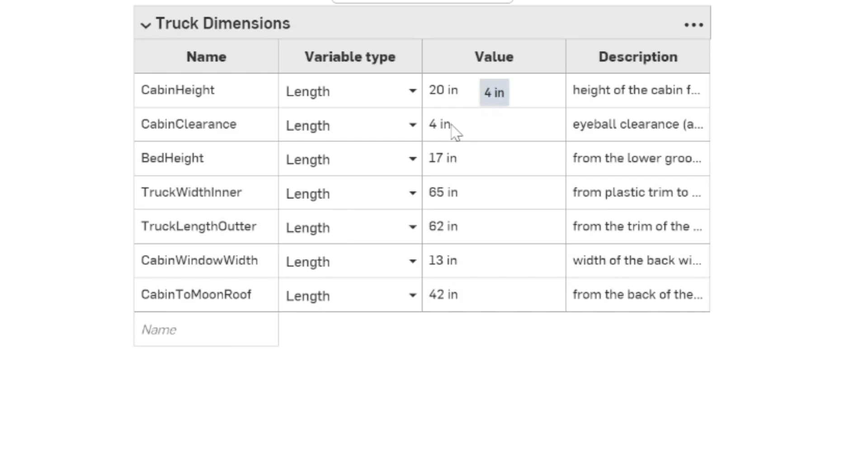So these are the measurements I got for the truck. I have a 20-inch cabin height, a 4-inch cabin clearance, a 17-inch bed height, and a 60-inch inner width, so this is going to be from trim to trim. Essentially, this is where I want my extrusion to fall just outside of, if that makes sense. So my trim is not in the 60 inches, it's right outside of the 60 inches. This is going to be the inside walls of the camper as well, or my inside space, how wide it feels like to me when I'm inside the camper.

The truck length outer is 62 inches, so this was from the cabin trim to essentially the tailgate, and like 1 or 2 inches into the tailgate. But the 62 inches is actually the measurement from the trim to the trim of that railing, the trim rail of the sides, and where that ends. So I'm using that as my truck length outer.

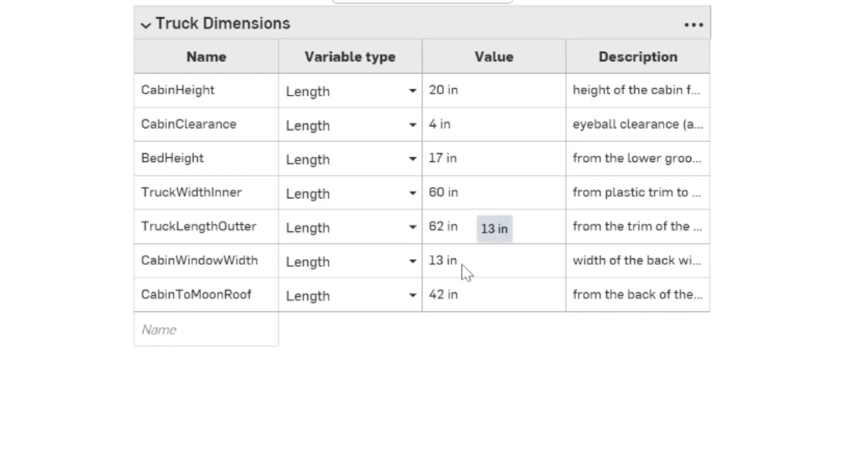My cabin window width is 13 inches. I don't actually end up using this. And then my cabin to moonroof is 42 inches.

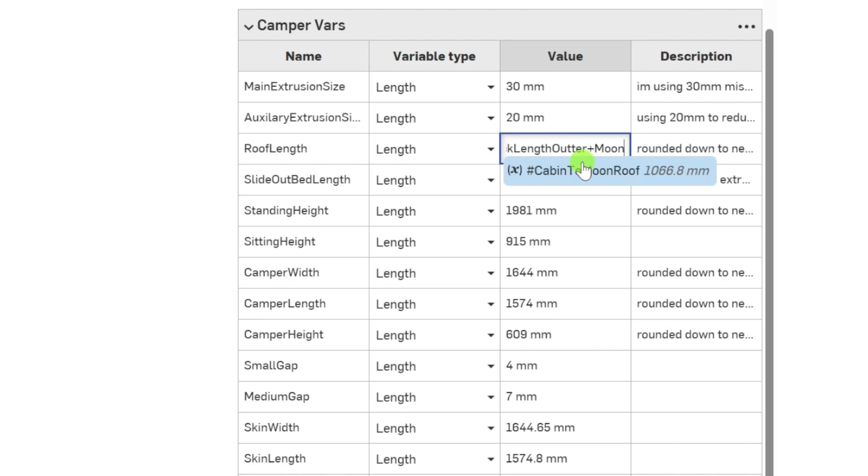So slide out bed, 75 inches. That's a full length bed size. Standing height is 78 inches. I once again kind of chose this number. Neither the standing height or the sitting height is important quite yet, just because I haven't finalized how I'm going to build the pop top.

Eventually, one of these two dimensions will drive my pop top height. I think it will probably be the sitting height, but I don't think I'm actually 36 inches tall when I'm sitting. I'll need to get help measuring my sitting height. But I do also want a little bit of clearance, so that I can stretch in bed when I'm waking up and not bump my head, for instance.

Camper width, so this is going to be the truck width inner plus the main extrusion size times 2, and then times 2. So I want the extrusion that's on the truck bed trim itself to be 2 extrusions wide, and then there's 2 of them on each side. So the overall camper width, that if you were to measure from outside of the camper, is going to be this dimension, which ends up being

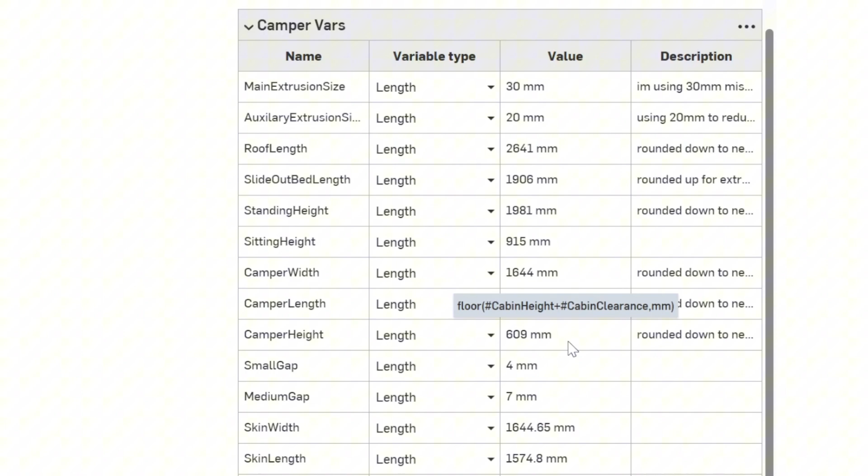1,644. Camper length, that's just our truck length in this case. Our camper height is the cabin height plus the cabin clearance, pretty straightforward. And then I have a small gap, which is 0.125 inches, and a medium gap, which is 0.25 inches.

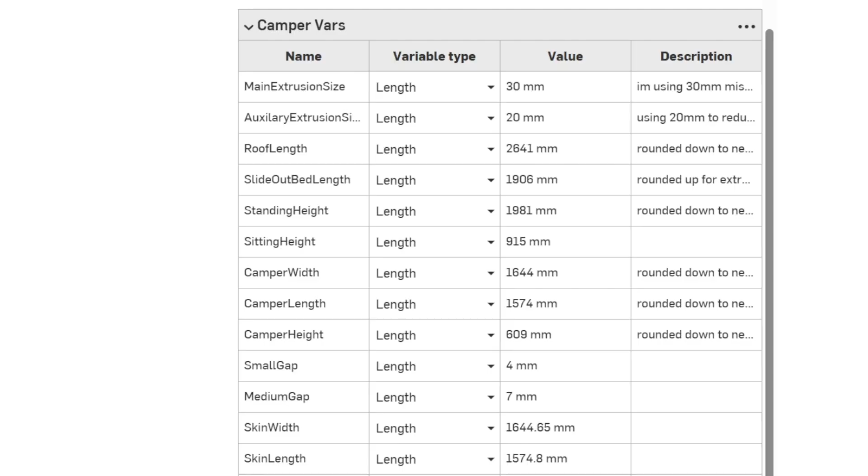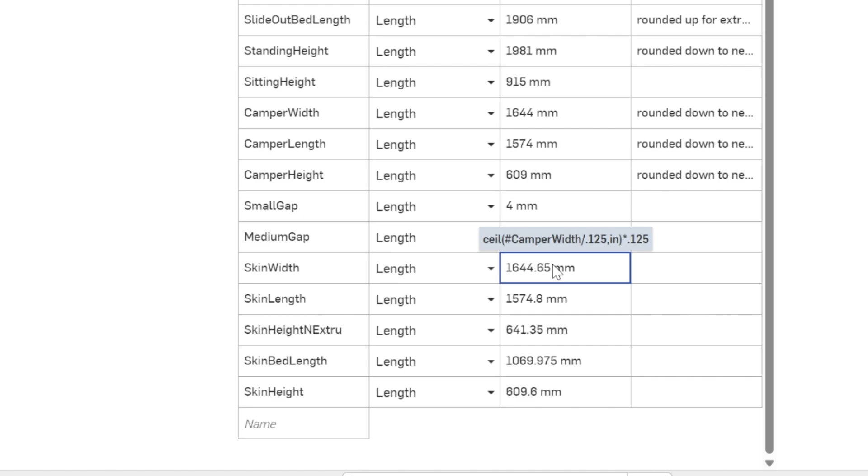I'm going to skip the skin right now, mainly because I don't think it's that important, but it's just calculated off the camper width and then rounding back to inches, and that's because, once again, if I'm supplying ACM skin and asking for it to be pre-cut by manufacturers here in the Bay, most of them are working in the imperial system, which means back to inches. So I'm taking my widths here and ceiling them and then rounding them to the nearest 1/8 inch, because that's usually the accuracy of the cut that they can provide.

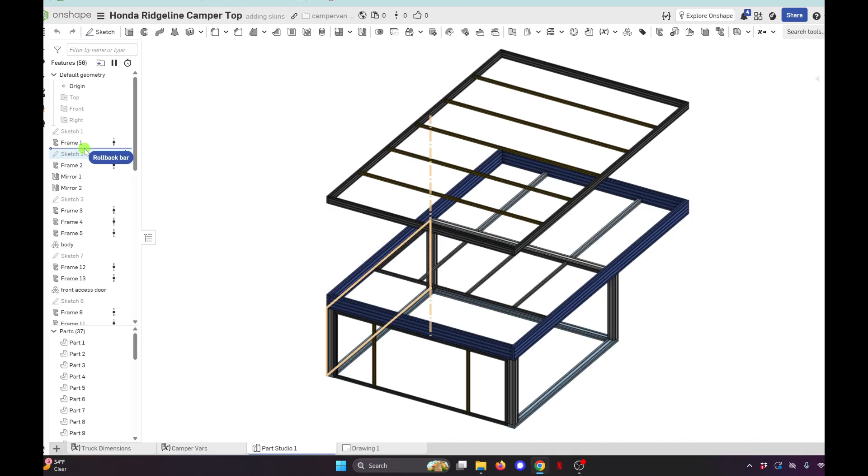Okay, so I'm going to go over how I designed the frame in OnShape as quickly as reasonable. The frame here, very straightforward. Building frames in OnShape is quite simple. You essentially make sketches and then the frames build around your sketch lines, or they can build around faces.

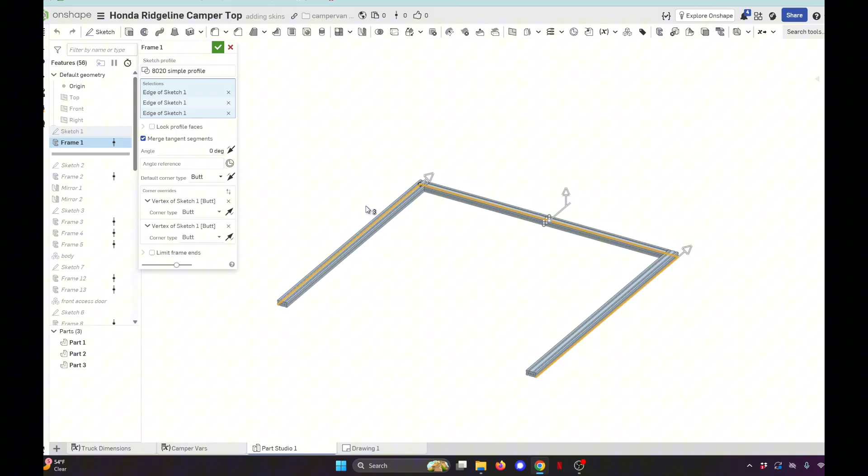So here, for example, I'm saying that, hey, I have this sketch. I want it to be - this is for the bottom part of the main body that is attaching to the truck. I want each of these pieces to be two wide. So I made my own 80/20 simple profile.

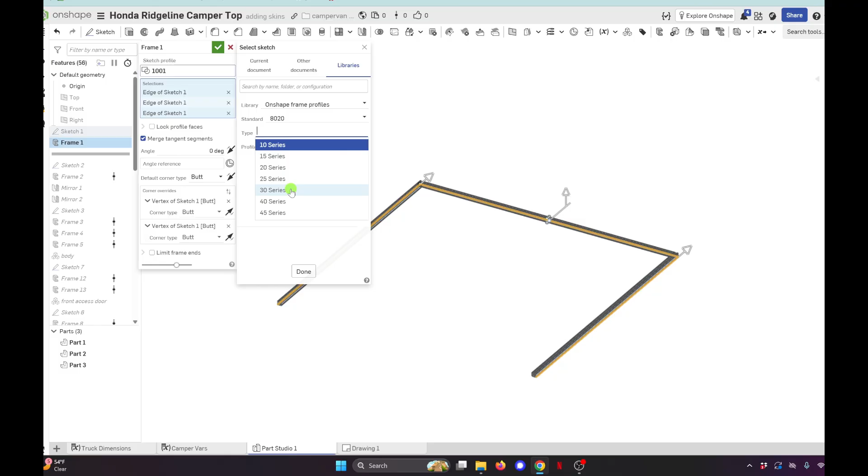And why I did this was because OnShape actually didn't have an extensive enough library for me to use. So they have an 80/20 library, and if, for instance, you were to use the main ones that other people use, you would have no problem using this. However, they didn't have things like - with the 80/20 series, they have the 30 series, but they didn't have a 30x120, which is like a 1x4 extrusion base. So I ended up just making my own, and I did that in another file.

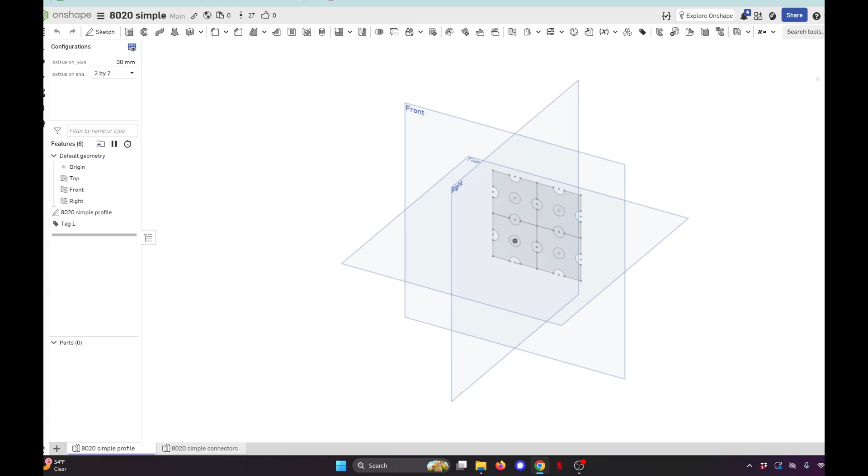Alright, so this is my simple profile. I've made a configuration panel, and we'll look at the 1x1 here. So the sketch for the 1x1 is quite simple.

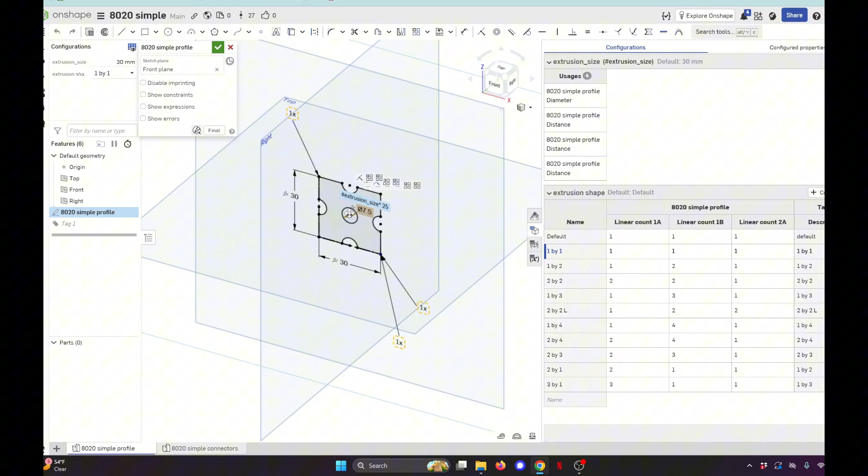It's a square. This is the extrusion size, and then for the 1x1 you just have an array of 1x1. I put 5 circles, so that I have the center, the sides like kind of like slots, and then there's a mate on the center of these sides, as well as a mate in the center of the square. So this allows me to create easy mates in the future.

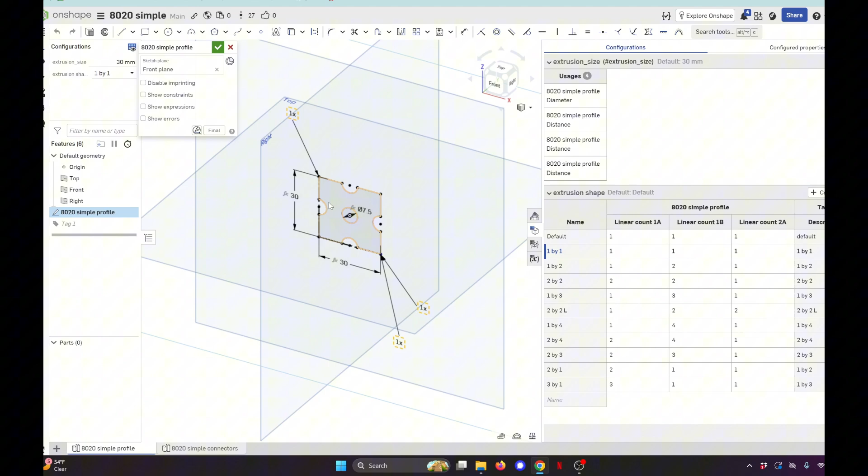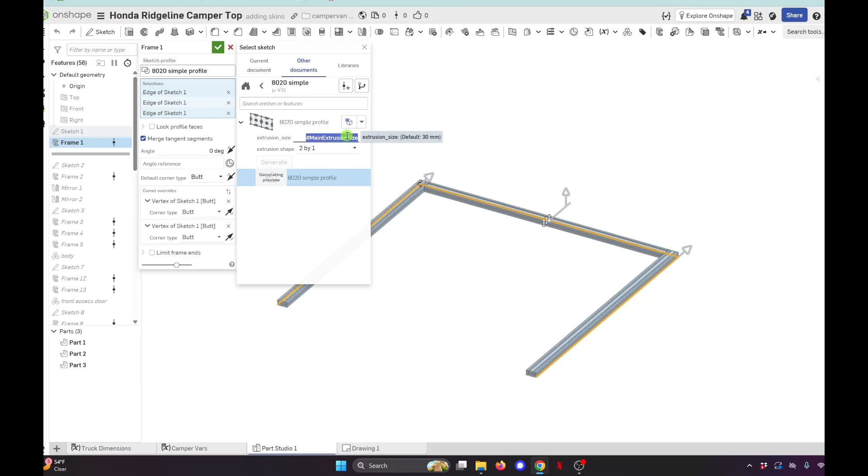So as you can see, I created this table to do configurations. You can have like a 1x2 or a 1x3. You'll see that there is an extrusion size here, but this is not a configured list. This is a configured variable, which means that when you ask OnShape to create the frame itself, you can tell it the variable numbers. So if I were to go and say, hey, I want this to be, I don't know, 60 millimeters, for instance, I can generate, and you can see now it widened, right?

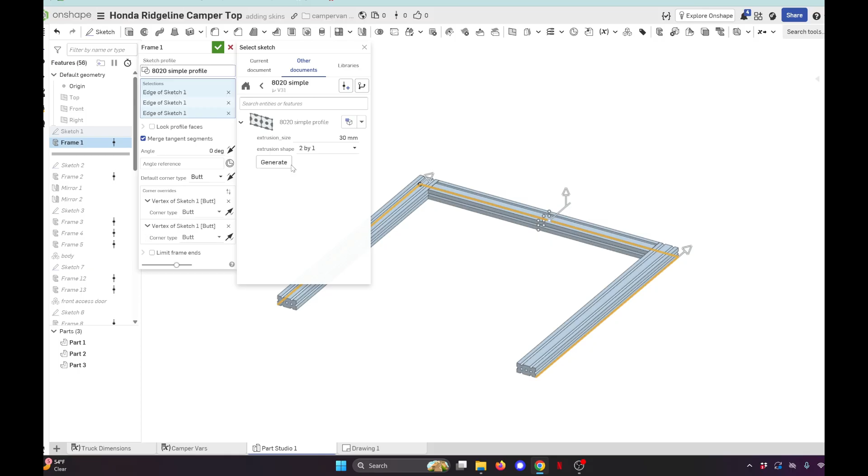But we're not going to do that. We want our main extrusion size, and so these are my variables that I created from the camper variables. I'm using a 2x1 for the shape, and then simple profile. Sometimes you might need to regenerate for it to reload. And why did that not load properly? Oh, because for some reason it didn't recognize that I chose the main extrusions. Sorry, sometimes it's confusing whether or not I need to click on something.

Alright, so as you can see, very simple to modify. And I use my variables to basically drive the main body and then the roof, so that if I wanted to change the extrusions, I could, but this is kind of the final design that I actually purchase my extrusion from, so I'm not going to change anything right now.

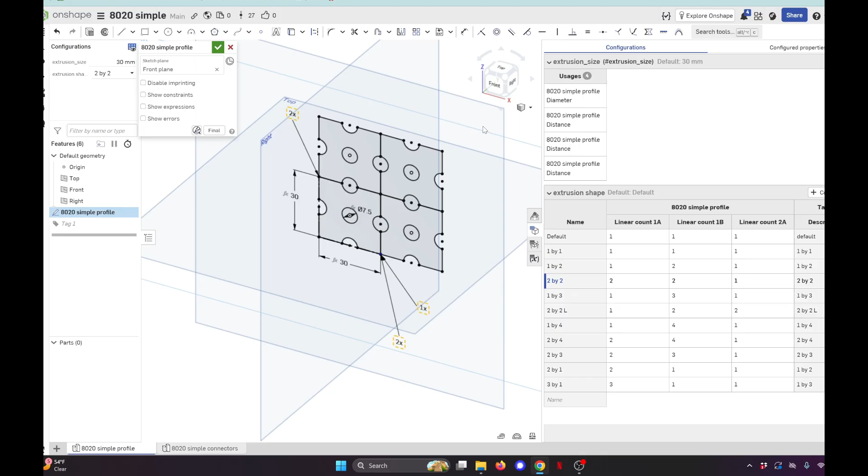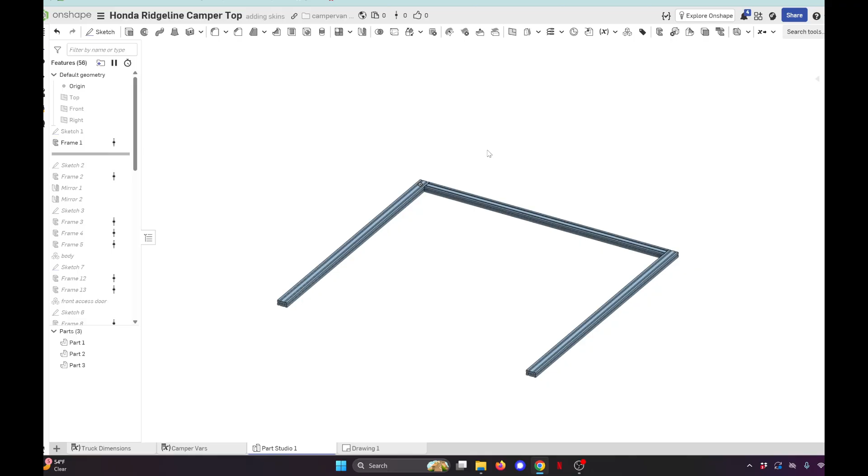The other thing about making your own profile is that you'll have to tag it. Tagging it will allow you to put a description, and otherwise the name of these shapes and the configuration doesn't come through on the frames itself. So by tagging it with a description, this description will show up in a bill of materials, and you'll see that in the end when I go through the frame.

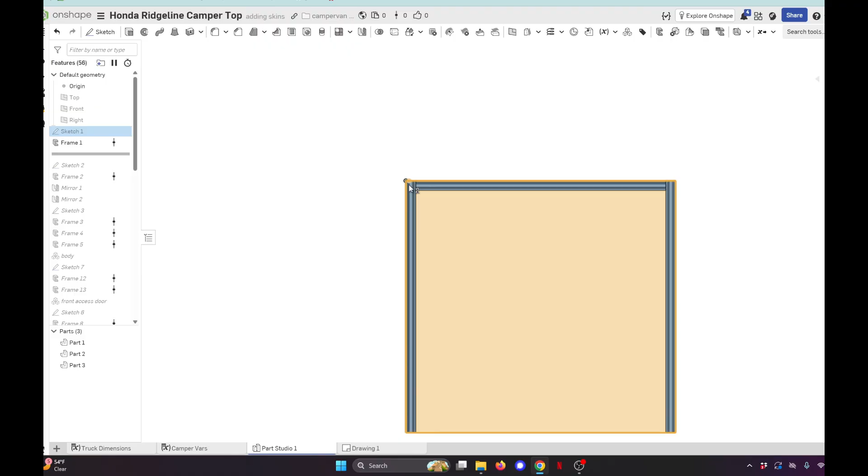So very simple. This is on the truck bed, so you'll see I have the camper width, camper length, and if we look at the frame itself along with the sketch, you'll see that the frame is nested, right? Which means that this is the full length of the camper and the full width of the camper. And then as you can see that this here should be my 60 inches.

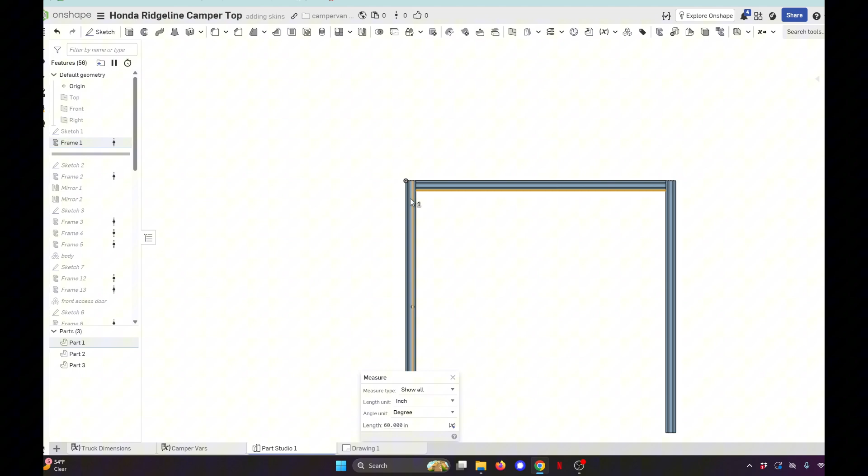So if I were to grab this and show you the measurement in inches, you'll see that it's 60 inches, and that's because of that driven variable where my camper width was my 60 inches plus. Since I'm using a 2 width extrusion, I'm doing 2 widths times 2, right, for my full camper width. And that was back in the variables.

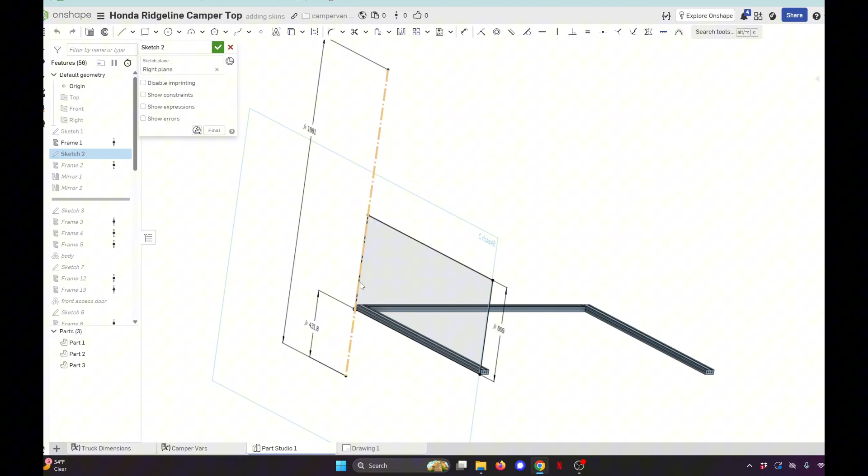For the vertical members, I'm just, once again, I have another sketch. Like I said, I'm not using these numbers just yet, but I put them there as a visual. So I have my camper height, and then I have my 4 vertical extrusions.

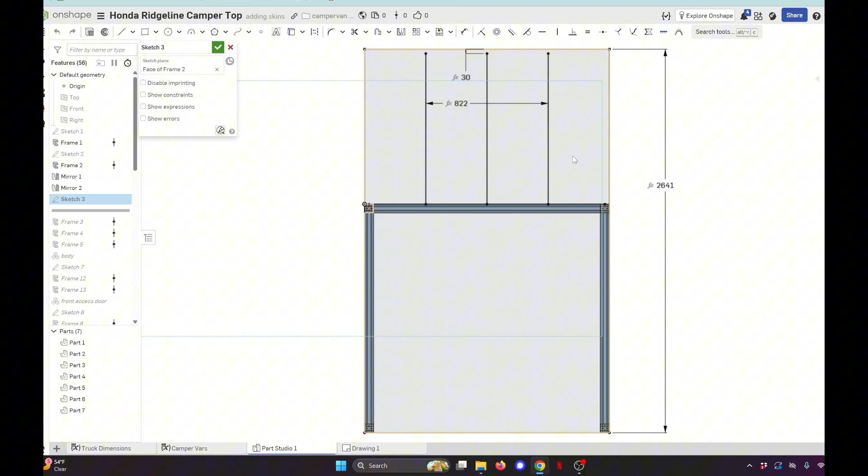Next I have my bed height. So if I were to go in here, this is just based on the camper width divided by 2. That's mainly because I wanted 3 ribs. But this here is dictated by the roof length. So this is your overall length of the outside for your camper.

And yeah, now this is our main body. So you'll see I said that, hey, this is my main body. Basically, it's all these members here. They're all 30mm extrusions, and we can move on to the front access door.

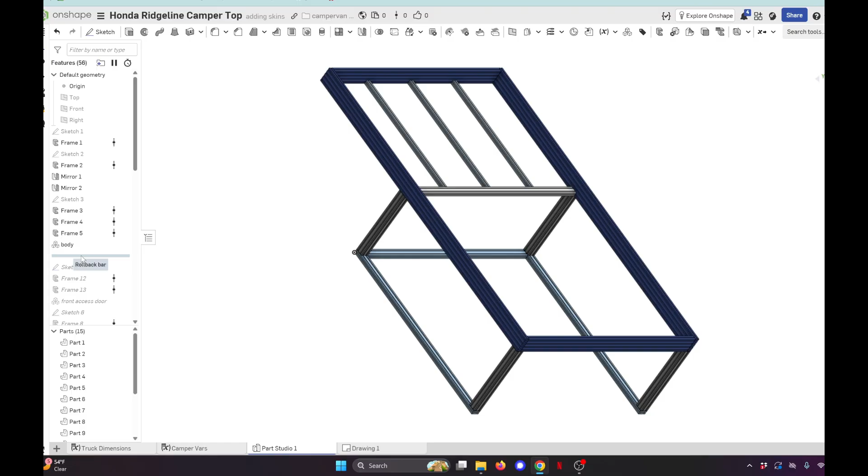So this is our first auxiliary component. The front access door is entirely driven by just the gaps. So it's constrained by the camper body itself already. It has 2 ribs, but you'll see that there's 3 lines shown here. I just don't end up making this a frame member. And then the top is driven by a medium gap, and the sides are driven by a small gap.

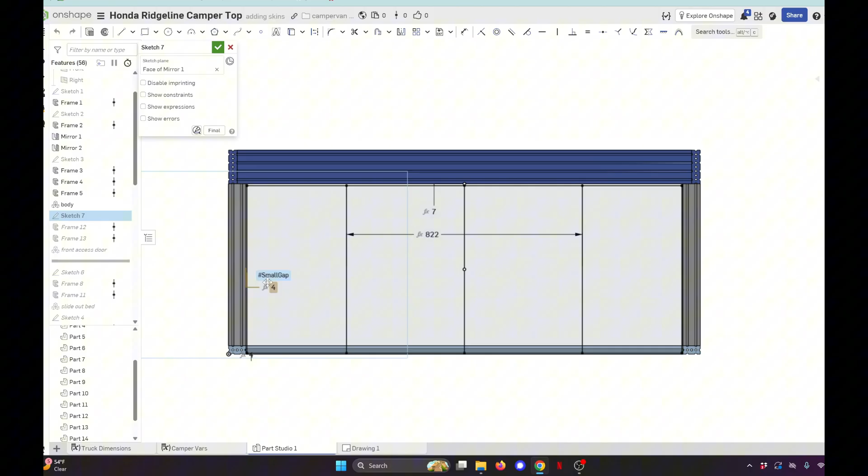So the reason for the medium gap is so that I can fit a piano hinge right between the 2 frames, and then that will allow me to attach the 20mm to the 30mm, and then have an access door that swings out and open.

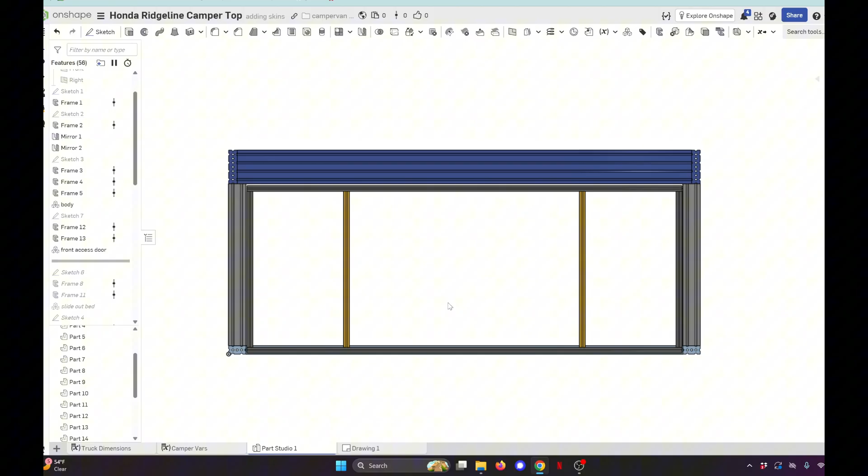Yeah, so you see that I have 2 ribs. The thinking behind that is that in the future, if I ever wanted to convert this into barn doors rather than an access door, I could cut this length in half with a miter saw, move these towards the center, and now suddenly I have 2 doors that I can put on some hinges here and have a barn door operating without too much effort, hopefully.

You know, things never go as planned, so.

Alright, top of the slide out bed. This is being dictated by my slide out bed length, and then I'm just adding an extra extrusion size. Even though this is being measured from the inside of the extrusion, and it should be 75 inches, I just thought I might put some foam tape on the inside to help with insulation. Maybe there might be some plywood, I don't really know. I just wanted an extra buffer in case I wanted to insulate the aluminum extrusion somehow from the bed area. That was one of my concerns.

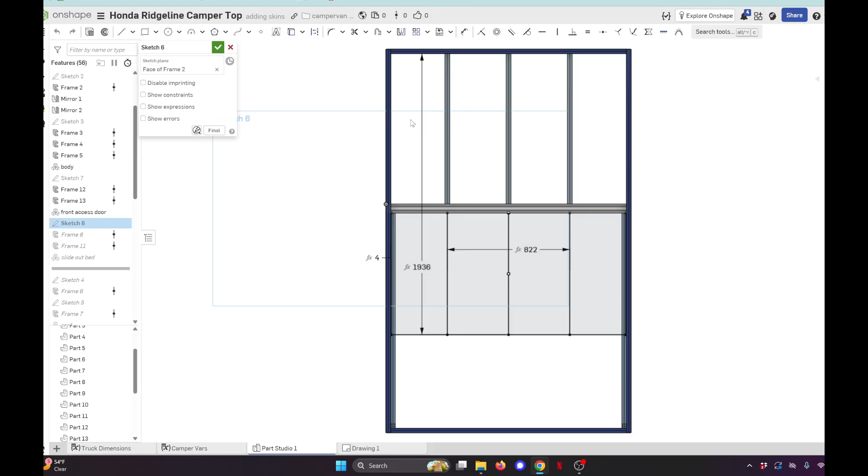And then we have a small gap just to make sure there's enough leeway so that this slides in and out smoothly. And then 3 ribs.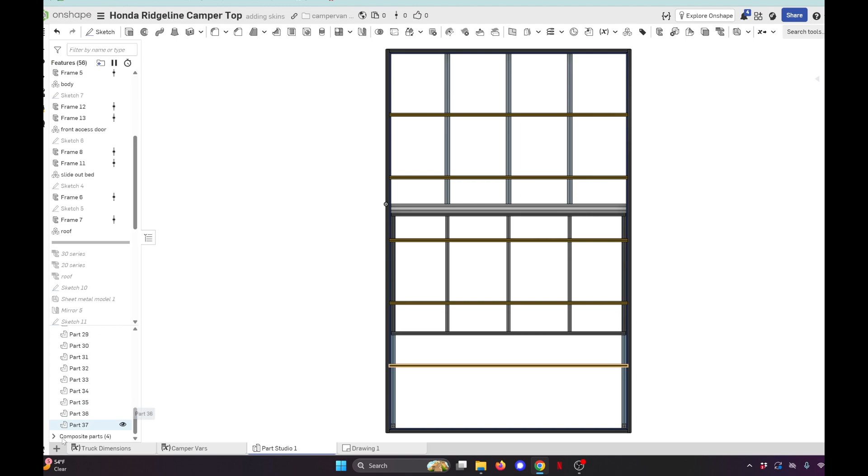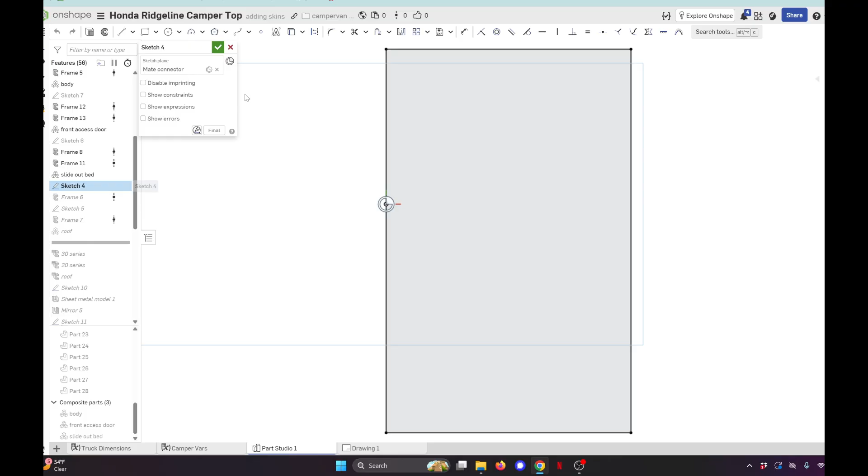And then we have our last member, which is our roof. We're gonna hide our other members just so it's easier to see. So this is our roof. It's pretty straightforward. It has a rectangle completely constrained by the bottom part of the camper. They're the exact same shape, so there's no measurements here.

And right now this is showing 5 ribs. None of this really matters just because they're not constrained. I'm not drilling holes along this beam in order to tie these in. I'm just connecting them with some inside connectors, and I can then freely place the beams as needed.

So I will have a solar panel at the front, and I will have a fan at the back here. I want to make sure that the ribs are not in the way of any hole cuts that I might need to do for wiring or for the fan cutout. So I just want to make sure I have 5.

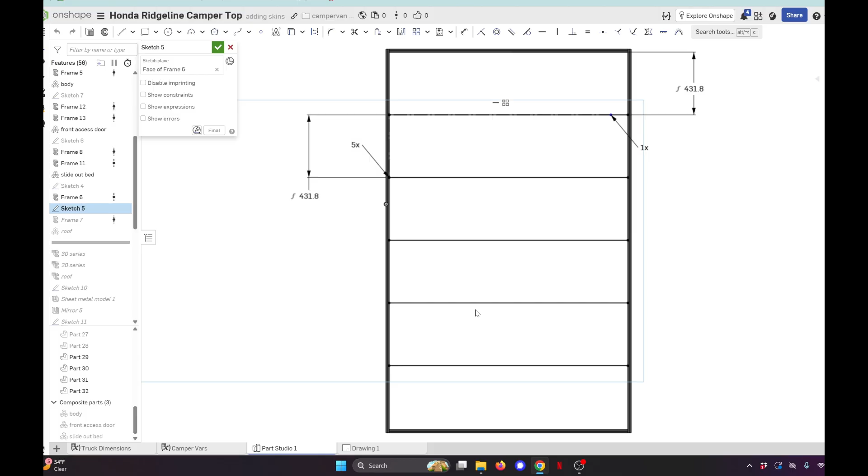I actually ended up ordering 6 ribs just because I was like, oh well, I like this, 5 looks good. This looks quite evenly spaced, it's 17 inches at each rib, and overall I think it's plenty of space, especially if I'm gonna do a plywood deck with 3/4 ply. But because I wasn't quite sure how the ribs would lay with the solar panel and the fan, I wanted to make sure I had enough ribs at the ply area where I'd be supporting human weight on the roof itself.

So then we have our cut list. This is pretty straightforward.

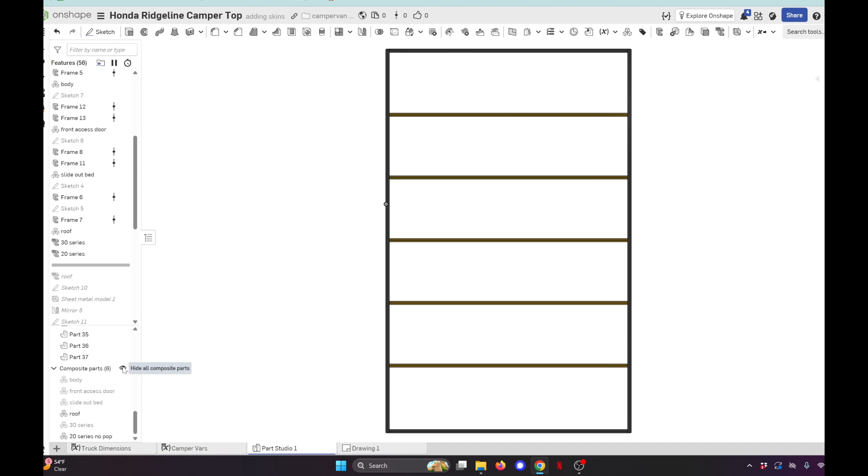This is all of the extrusion that we have built so far. The 30 series, as you saw, was just the main body. If I click on this, it'll get highlighted. And the 20 series is everything else - that's your roof, your slide out bed, and the access door.

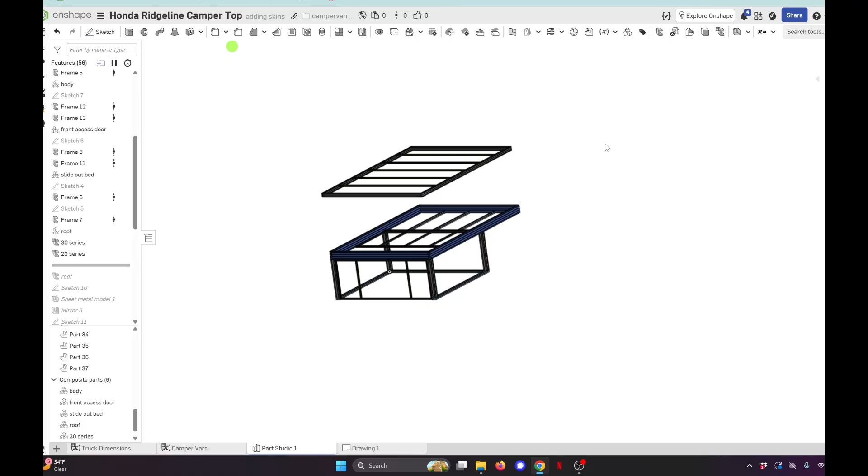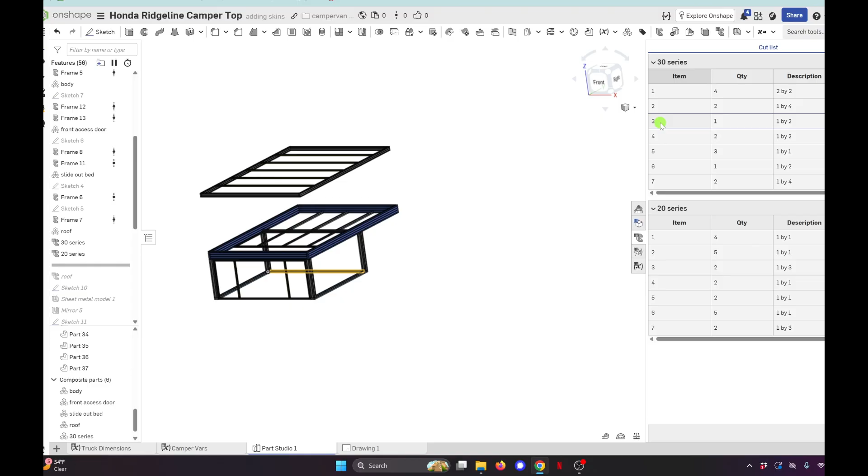And what's really awesome that Onshape does is it provides you a cut list. This description was not here until I added that tag. I was like, wait, how do I know what members are what extrusion size without having to look it up? So adding the tag lets me easily say, okay, that was a 1x4, this is 2x2s, and when I click on these items, they'll highlight and show you which piece it's referring to. There's the length, and I've hidden the angles, but everything is 0 for me since there's no miter cuts.

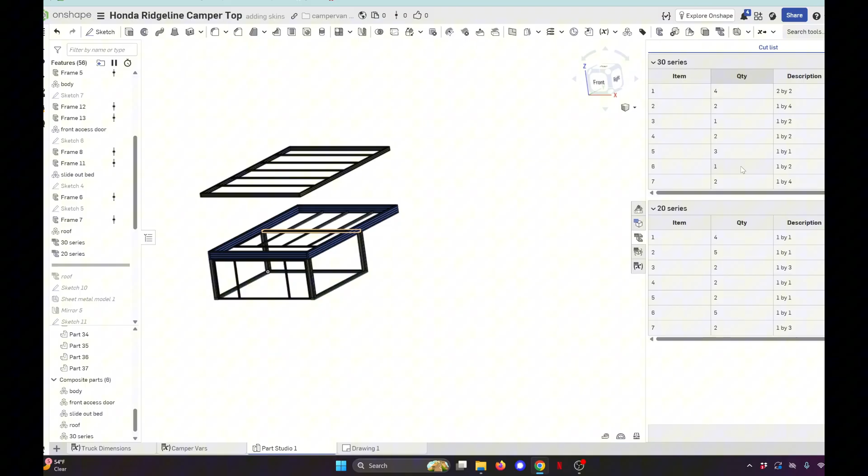Yeah, so that is the frame, the profiles. Next time I'll talk about how I take this bill of materials from Onshape and create a list of materials to buy from Misumi, and why I chose Misumi over T-Nuts. All right, see you next time.